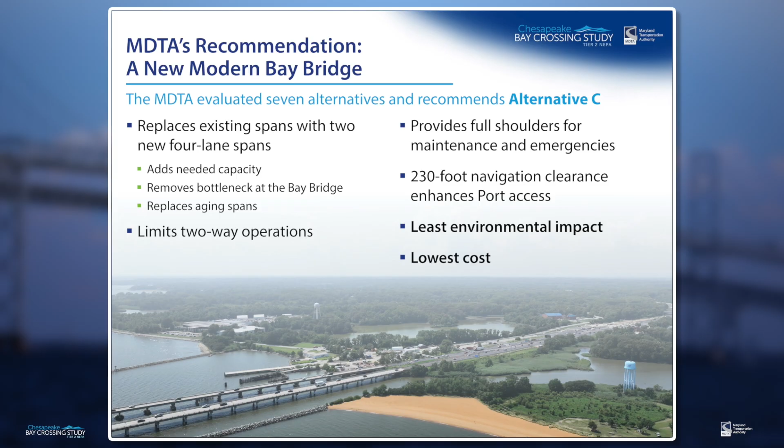To address these issues, the MDTA recommends a new, modern Bay Bridge. After evaluating 7 alternatives, the MDTA recommends Alternative C. Alternative C would replace the existing aging spans with 2 new 4-lane spans, adding the needed capacity and removing the bottleneck at the Bay Bridge. It would have 4 lanes for travel in each direction, reducing the need for two-way operations and improving the reliability of crossing the bay, increase the vertical navigational clearance to 230 feet to meet U.S. Coast Guard requirements and enhance port access, provide full shoulders for maintenance and emergencies, have the least environmental impact and lowest cost, and eliminate the need for extensive maintenance and rehabilitation of the existing spans.

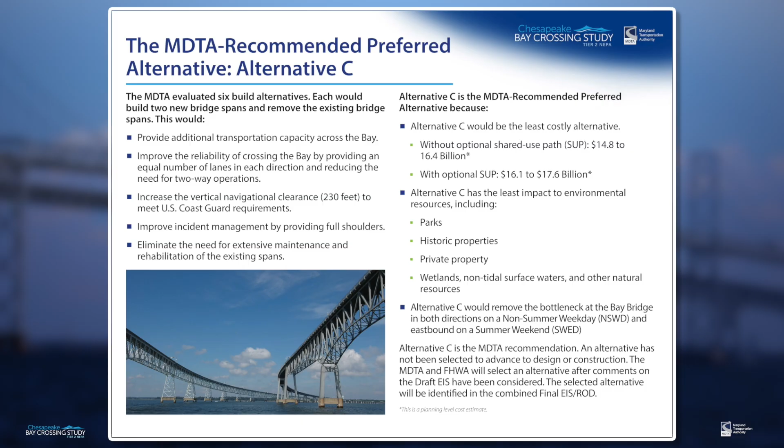Alternative C is the MDTA RPA because it would be the least costly alternative, ranging from $14.8 to $16.4 billion without an optional shared use path, and from $16.1 to $17.6 billion with an optional shared use path. We will discuss the shared use path in more detail later. Please note that these costs are based on a planning level cost estimate.

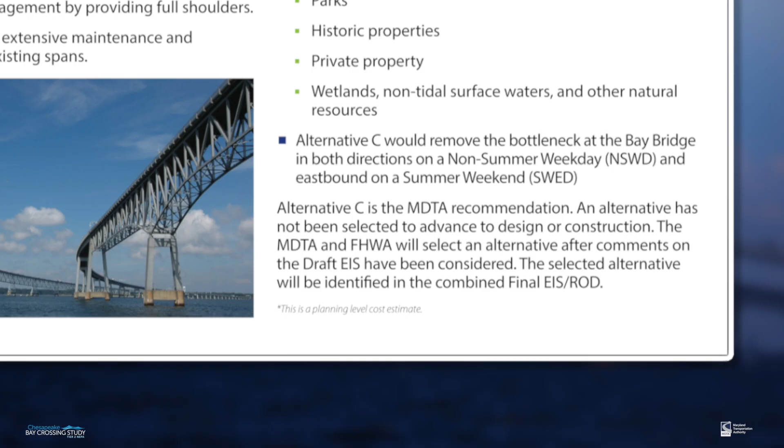Alternative C would remove the bottleneck at the Bay Bridge in both directions on non-summer weekdays and in the eastbound direction on summer weekend days. It would have the least impact to environmental resources such as parks, historic properties, wetlands, non-tidal surface waters, and other natural resources, as well as private property.

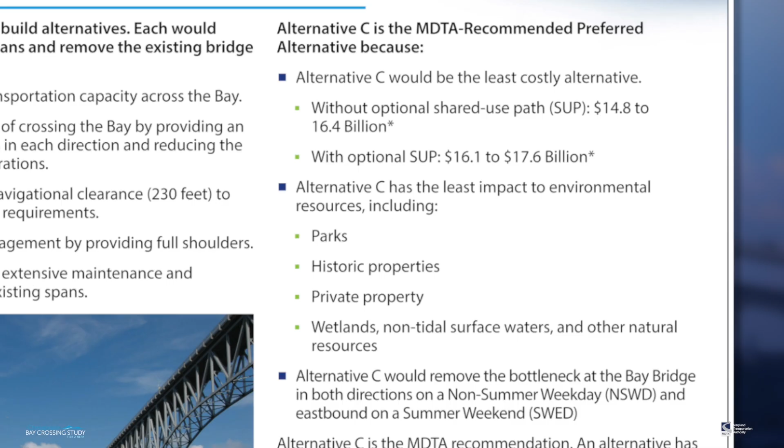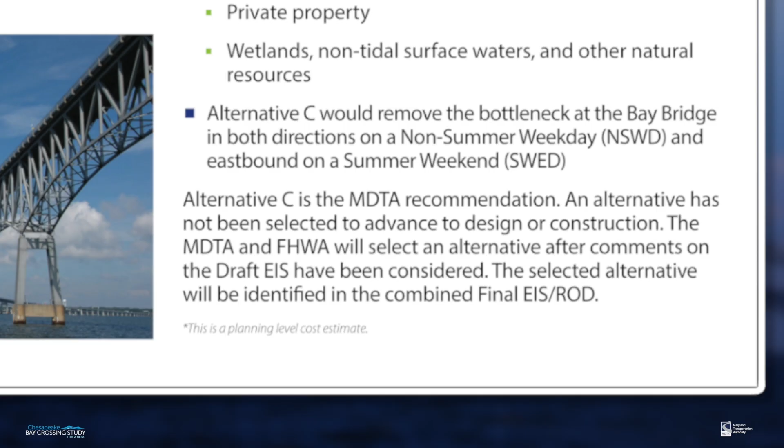Please note that Alternative C is the MDTA's recommendation. The MDTA and FHWA will identify a selected alternative in the combined final EIS and record of decision following the review of agency and public comments on the draft EIS.

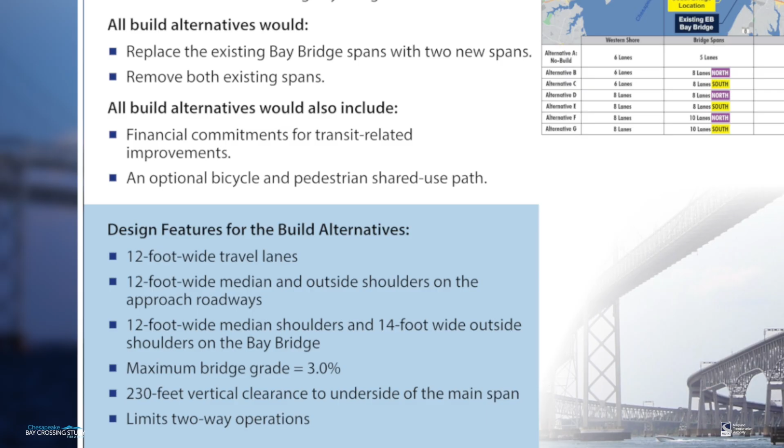As mentioned, the MDTA evaluated 7 alternatives, including a no-build alternative and 6 build alternatives. Each of the build alternatives would include the construction of 2 new Chesapeake Bay Bridge spans, replacing the existing spans. They differ by the number of lanes on the new bridge and US 50/301 approach roadways, as well as location of the new bridge spans, with one span north or south of the existing spans and the other between them. The build alternatives would also include a financial commitment for transit improvements, along with an optional bicycle and pedestrian shared use path.

Alternative A, or the no-build alternative, does not meet the study's purpose and need, but serves as a baseline for comparison with the build alternatives. It would retain the current bridge and lane configuration, offers no capacity improvements, and would require extensive maintenance and rehabilitation, leading to increased congestion. The no-build alternative would cost approximately $3.8 billion in today's dollars in maintenance of the Bay Bridge through 2065, including major rehabilitation.

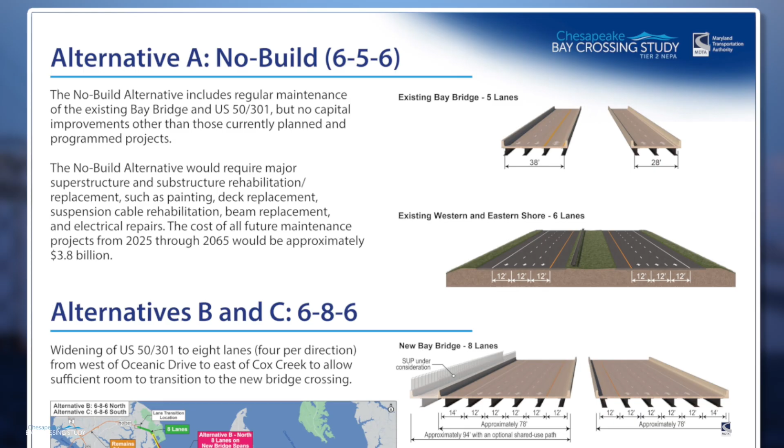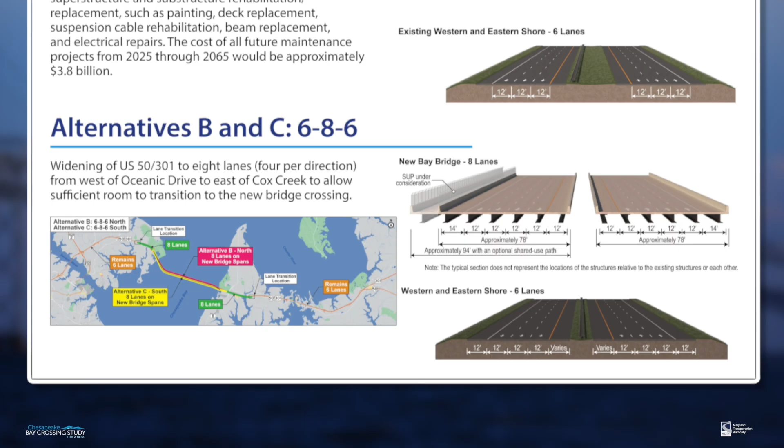In contrast, alternatives B and C propose a 6-8-6 lane configuration. They would have 8 lanes across 2 new spans, 4 in each direction, with 6 lanes on both shores. The transition from 6 to 8 lanes would occur west of Oceanic Drive and east of Cox Creek. Alternative B would build 1 new span just north of the existing spans and 1 between the existing spans. Alternative C would build 1 new span just south of the existing spans and 1 between the existing spans. Both alternatives are 8.3 miles in length and would include modifications to some interchange ramps.

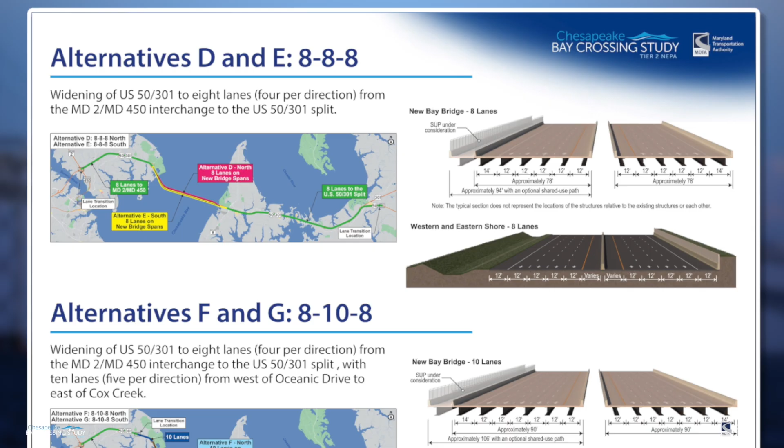Alternatives F and G propose an 8-10-8 configuration and include 10 lanes across a new 2-span bridge with 8 lanes on US 50/301. Similar to alternatives D and E, the transitions from 6 to 8 lanes would occur at the Maryland 2 and Maryland 450 interchange and at the US 50/301 split. The transitions from 8 to 10 lanes would occur west of Oceanic Drive and east of Cox Creek.

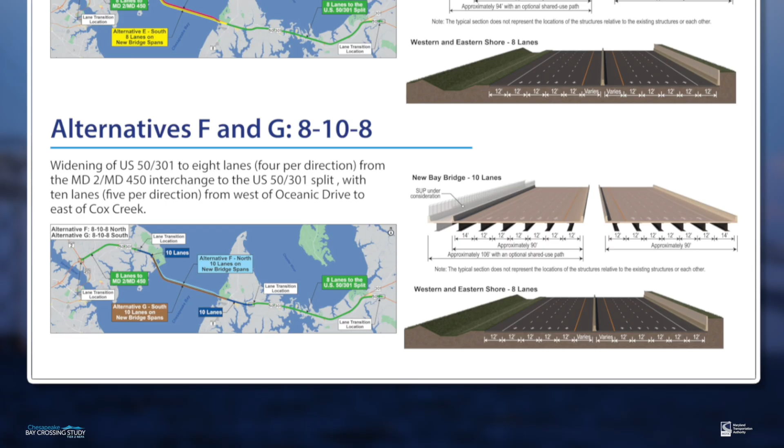Alternative F would build one new span just north of the existing spans and one between the existing spans. Alternative G would build one new span just south of the existing spans and one between the existing spans. Alternatives D, E, F, and G are 20.4 miles long and would include modifications to all interchange ramps between Maryland 2, Maryland 450, and the US 50/301 split, and require widening of the Kent Narrows Bridge.

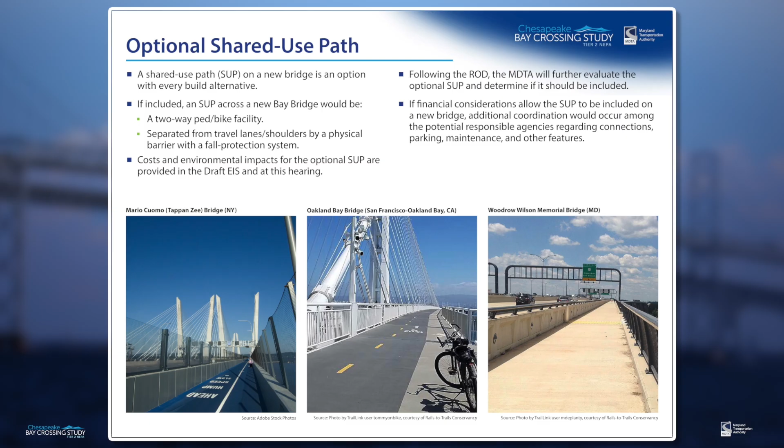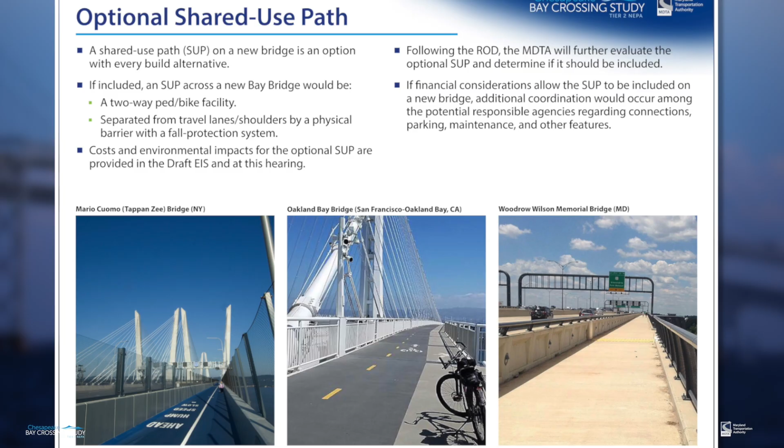A shared use path on a new bridge is an option with every build alternative. If included, the shared use path would be a two-way pedestrian and bicycle facility separated from the travel lanes and shoulders by a physical barrier. It would also include a fall protection system. Following publication of the combined final EIS and record of decision, the MDTA will further evaluate whether to include the shared use path based on financial and other considerations.

Construction of Alternative C, the MDTA RPA, would be phased to keep traffic flowing and ensure a safe transition to the new Bay Bridge spans. The following is a potential construction sequencing option.

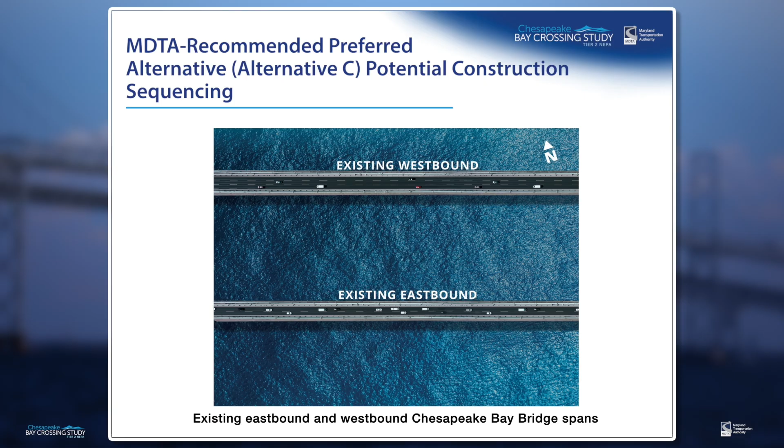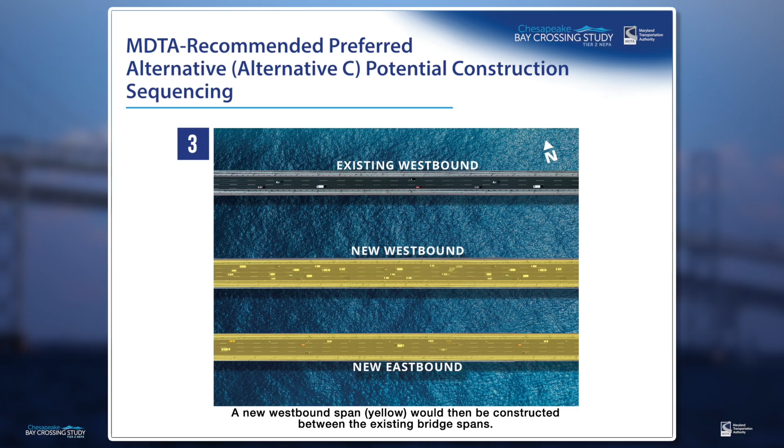Shown are the existing eastbound and westbound Chesapeake Bay Bridge spans. First, a new eastbound span would be built south of the existing bridges and open to traffic. The existing eastbound span would then be removed. Next, a new westbound span would be built between the new eastbound span and the existing westbound span. Finally, the existing westbound span would be removed. Shown are the completed new eastbound and westbound Chesapeake Bay Bridge spans.

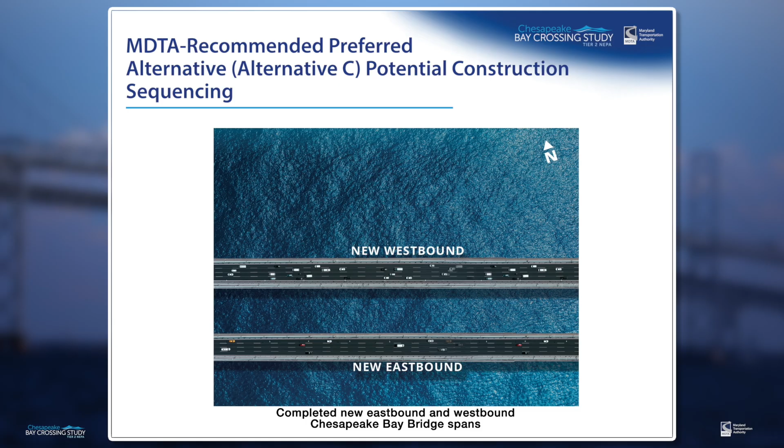These renderings present examples of what a potential suspension or cable-stayed bridge could look like from the Sandy Point State Park beach. To meet navigational clearance requirements, the new bridge deck and towers would be higher than the existing spans. The new towers could be 400 to 570 feet high, compared to the existing 354-foot eastbound and 379-foot westbound towers. Please note that these concepts are for planning purposes only and are subject to change during final design.

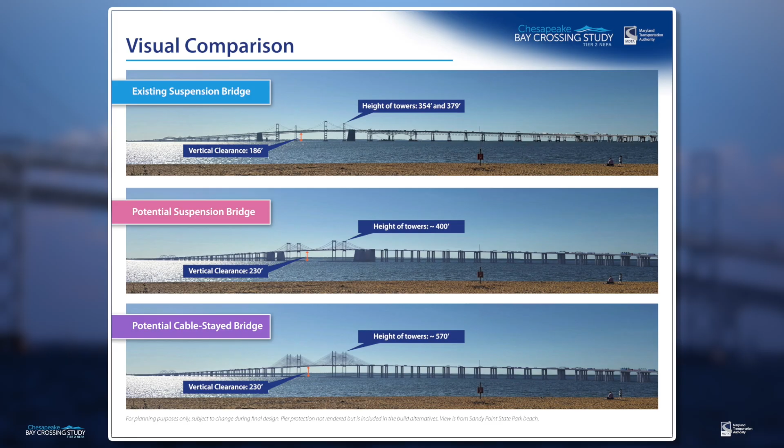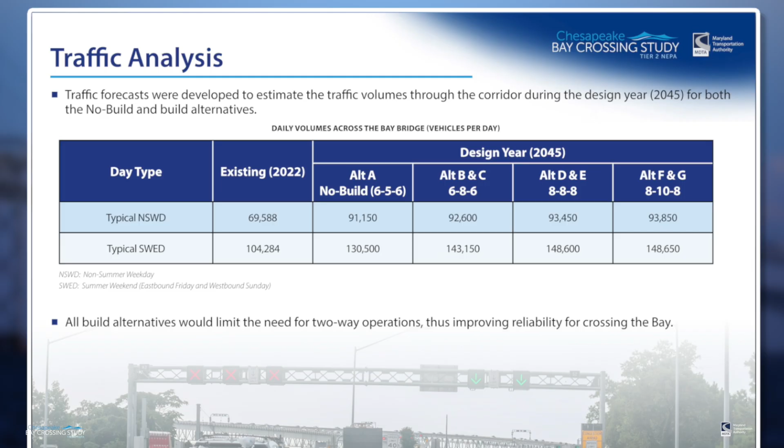Under the no-build alternative, traffic volumes are expected to increase 31% on non-summer weekdays and 25% on summer weekend days, reflecting annual growth rates typical for the region. Under the build alternatives, traffic volumes are expected to be slightly greater than under the no-build alternative. All build alternatives would limit the need for two-way operations, thus improving reliability for traffic crossing the bay.

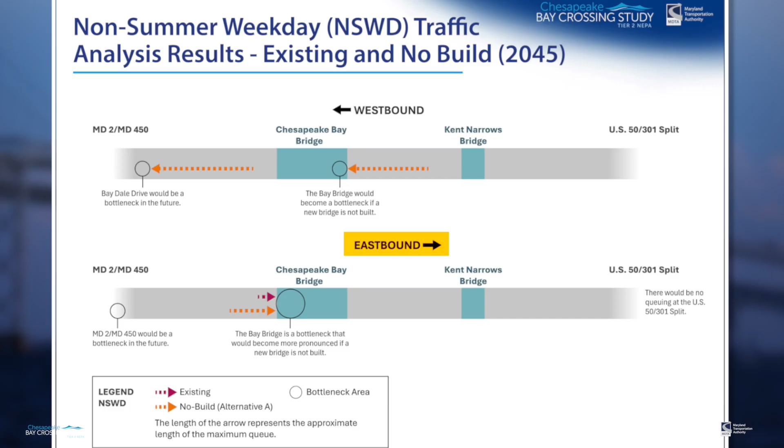This figure shows the existing and 2045 no-build non-summer weekday traffic bottleneck areas and approximate maximum queue lengths. When traveling westbound, both the Bay Bridge and Bay Dale Drive would become bottlenecks if a new bridge is not built, leading to longer traffic queues. When traveling eastbound, the existing bottleneck at the Bay Bridge would become more pronounced, and the Maryland 2, Maryland 450 interchange would become a new bottleneck if a new bridge is not built.

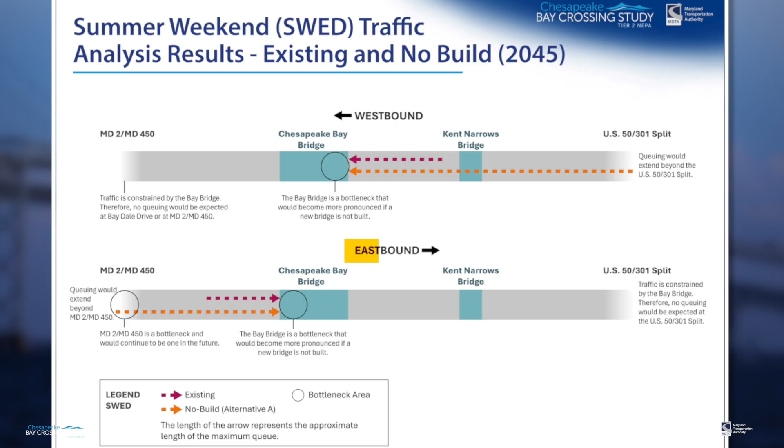Here you can see the existing and 2045 no-build summer weekend traffic bottleneck areas and approximate maximum queue lengths. Without a new bridge, summer weekend bottlenecks at the Bay Bridge would become more pronounced. When traveling westbound, queues would extend past the US 50/301 split. Because traffic is constrained by the bridge, no queuing is expected further west at Bay Dale Drive or at the Maryland 2 and Maryland 450 interchange. When traveling eastbound, bottlenecks at the bridge and the Maryland 2 and Maryland 450 interchange would also become more pronounced, resulting in queues beyond the interchange. Because traffic is constrained by the bridge, no queuing is expected further east at the US 50/301 split.

This figure shows non-summer weekday traffic bottleneck areas and approximate maximum queue lengths for the build alternatives in design year 2045. All build alternatives would remove the bottleneck at the Bay Bridge in both directions, allowing traffic to flow freely across the bridge. When traveling westbound past the bridge, alternatives B and C would see queuing at Bay Dale Drive, while alternatives D through G shift the bottleneck to the Maryland 2 and Maryland 450 interchange. When traveling eastbound under all the build alternatives, the Maryland 2 and Maryland 450 interchange would be a bottleneck. There would be no queuing at the US 50/301 split.

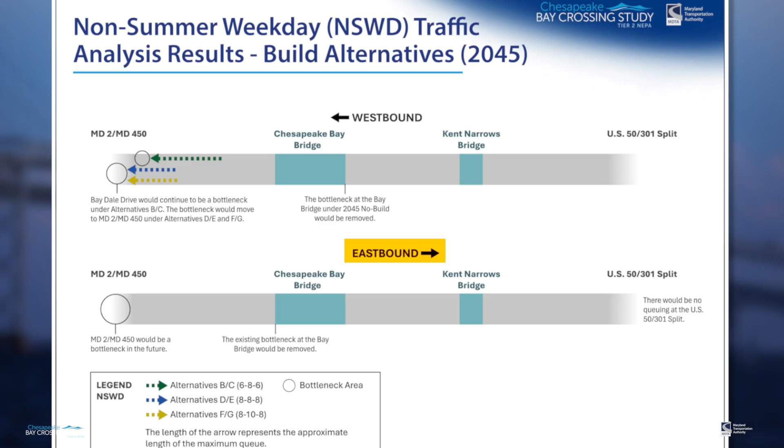Shown here are the summer weekend traffic bottleneck areas and approximate maximum queue lengths for the build alternatives in design year 2045. All of the build alternatives would result in bottlenecks on both shores when traveling in either direction on a summer weekend. When traveling westbound, a bottleneck would exist at Bay Dale Drive with alternatives B and C, while alternatives D through G shift that bottleneck to the Maryland 2 and Maryland 450 interchange. These bottlenecks would lead to queuing extending beyond the Bay Bridge for all alternatives and beyond the US 50/301 split for alternatives B through E.

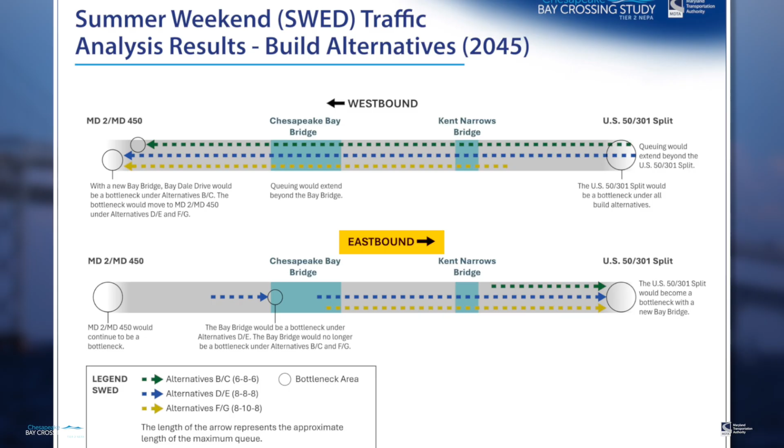When traveling eastbound, only alternatives D and E would lead to a bottleneck at the Bay Bridge, while the existing bottleneck at the Maryland 2 and Maryland 450 interchange would continue for all build alternatives. The US 50/301 split under all build alternatives would be a new bottleneck, with queues extending to the Bay Bridge under alternatives D through G. More detail on the traffic analysis is presented on the boards posted to the website.

We are holding the public hearings and sharing this information so that you are informed and can provide your comments on the study's draft EIS. An EIS is required by the National Environmental Policy Act, or NEPA, and supports decision-making by describing the potential environmental impacts of the proposed project alternatives. The Tier 2 study draft EIS includes the purpose and need, alternatives, existing environmental resources and potential impacts, mitigation measures, and public and agency input used in the development of alternatives and in decision-making. The draft EIS was published in the Federal Register on January 23, 2026, and is available for public review.

Comments on the draft EIS will be accepted until March 9, 2026. All comments received on or before this date will be considered in the development of the combined final EIS and record of decision, which is anticipated in November 2026.

The draft EIS analyzed potential impacts from the build alternatives to various resources, including natural, cultural, and socioeconomic resources, public parks and historic sites, air quality, potential noise-sensitive areas, and hazardous materials.

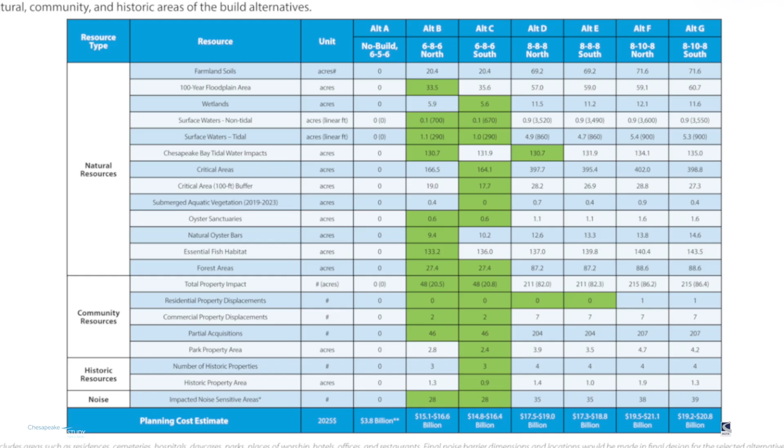As you can see, Alternative C has the least impact to natural, community, and historic resources. Alternative C is also the least expensive, with an estimated cost of $14.8 to $16.4 billion. This cost does not include the optional shared use path, which will be discussed on the next slide. As mentioned earlier, please note that these costs are based on a planning level cost estimate.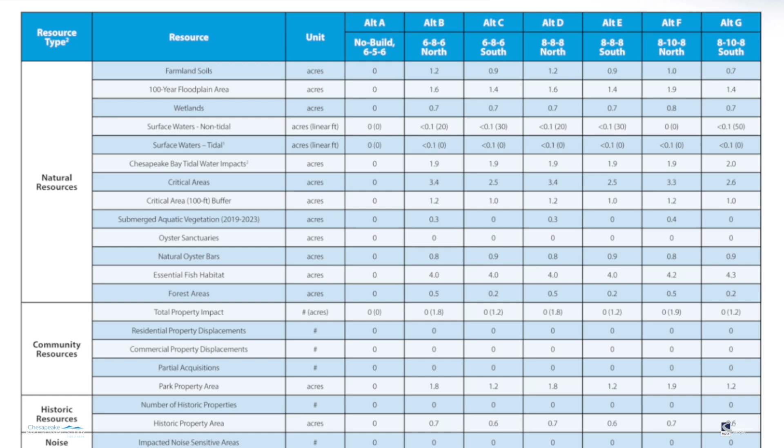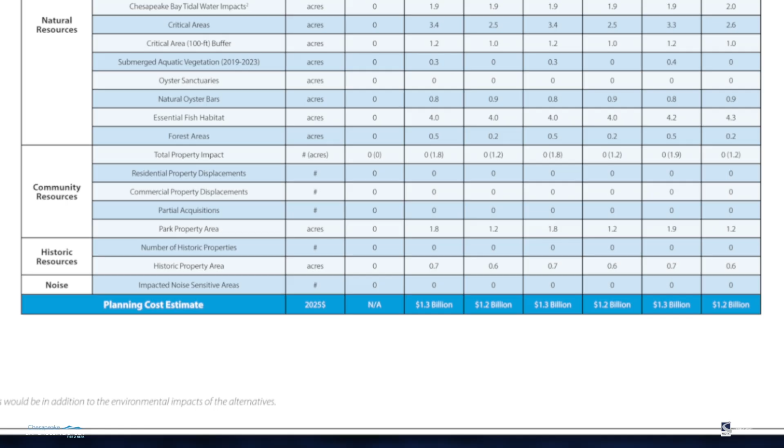Since the shared use path is being advanced independently as an option to the build alternatives, its potential impacts are quantified separately from the build alternative impacts. As you can see, the impacts for the optional shared use path are generally consistent for all build alternatives. The shared use path cost is also generally the same for all build alternatives, with the cost ranging from $1.2 to $1.3 billion. These costs are also based on a planning level cost estimate.

Section 106 of the National Historic Preservation Act requires projects receiving federal funding or federal approvals to consider impacts on historic properties. The MDTA initiated consultation with the Maryland Historical Trust, the State Historic Preservation Officer, federally recognized tribes, local governments, and other interested stakeholders.

The MDTA is additionally preparing a programmatic agreement outlining mitigation strategies, protocols for additional archaeological surveys, and procedures for continued consultation during final design.

Section 4(f) of the U.S. Department of Transportation Act of 1966 is a federal law that provides protections to parks, recreation areas, wildlife refuges, and historic sites. Alternative C would have the least impact to parks and historic sites.

The Chesapeake Bay, rivers, streams, and wetlands are protected under the Federal Clean Water Act and various Maryland laws and regulations. Impacts to waterways and wetlands from the build alternatives would be associated with roadway grading, pavement, new structures including bridge piers, and in-water dredging. Alternative C would have the least impact to these resources.

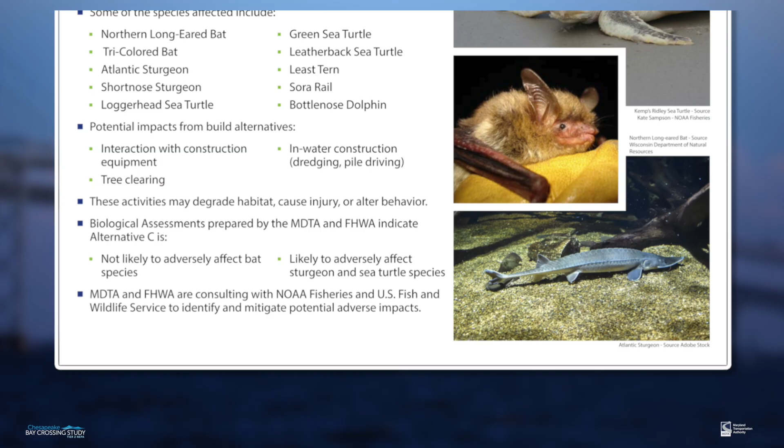The build alternatives could impact species protected by the Federal Endangered Species Act, the Magnuson-Stevens Act, and the Marine Mammal Protection Act. Potential impacts could include interaction with construction equipment, tree clearing, and in-water construction activities such as dredging and pile driving. Based on the preliminary assessment, Alternative C is not likely to adversely affect listed or proposed bat species, and is likely to adversely affect listed sturgeon and sea turtle species.

Right-of-way acquisition would be required for all the build alternatives. All impacted property owners would be fairly compensated in compliance with the Uniform Relocation Assistance and Real Property Acquisition Policies Act.

The economic analysis showed that construction of the MDTA RPA could generate up to $23 billion in economic activity, support up to 75,600 jobs, create up to $6 billion in labor income, and increase regional GDP by up to $12.9 billion.

A proposed 230-foot high bridge, which matches the proposed new clearance of the Francis Scott Key Bridge, would accommodate larger ships, increasing cargo capacity, revenue, port activity, jobs, and business growth, helping the Port of Baltimore and the state of Maryland increase its current and future economic activities.

After the draft EIS comment period, the MDTA and FHWA will review all comments received and prepare a combined final EIS and record of decision in November 2026, which will present the selected alternative.

Final design procurement activities could begin as early as the fall of 2026, with design potentially starting in spring 2028 and construction potentially starting in summer 2032.